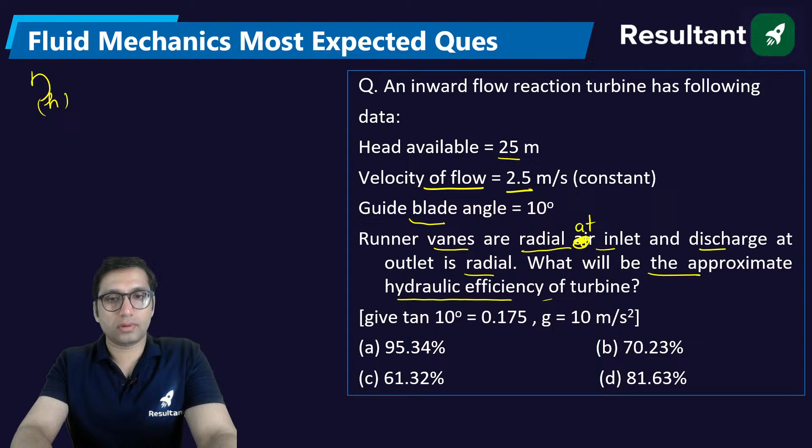So what is the formula for the hydraulic efficiency? The hydraulic efficiency is the ratio of runner power to the water power, right? Now, how can you find the runner power? The formula for runner power of a turbine is rho into Q into VW1 into U1 plus VW2 into U2.

Okay, nice strategy, Deepa. You can follow this strategy. Prepare for production subject. It is having high weightage. At least your high weightage subject will be prepared. And industrial is also having weightage of around 10 marks at least. So at least 50 to 60 marks will be prepared. That's also a great strategy. You can follow that, and there's nothing wrong in that.

And velocity of the flow is constant. So U1 is equal to U2 is equal to U, that is given to you in this question. And because at the outlet the discharge is radial, runner power will be rho into Q VW1 into U1. Now in this question they have given few things. How to find the value of hydraulic efficiency? The hydraulic efficiency will be equal to rho into Q VW1 into U1 divided by rho G QH.

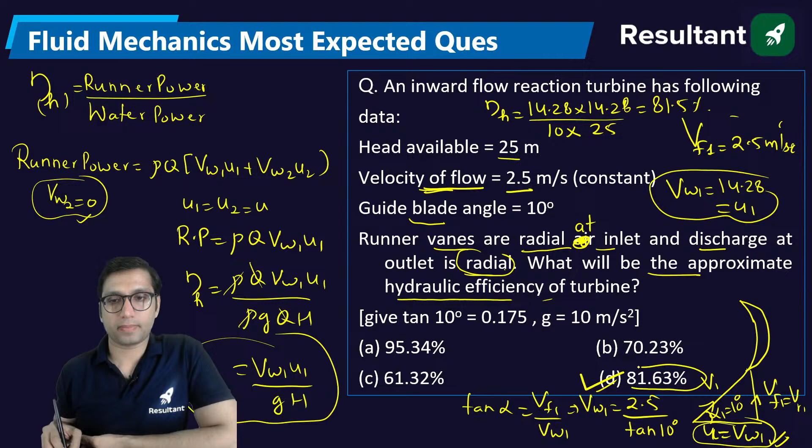Understood the question, everyone? Next question: the head loss due to friction for the flow of water through penstock can be minimized by what? How can you minimize the head loss due to friction when the water flows through the penstock of a turbine? Yes? How can you minimize that?

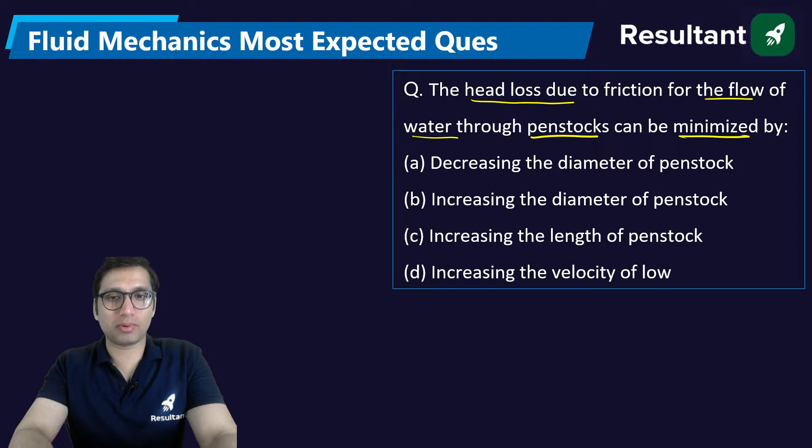Yes, what is the answer? How to minimize head loss due to friction? See, head loss due to friction is equal to FLV square by 2GD. Now formula is going to remain same. This is the formula for head loss due to friction. Head loss due to friction is minimized. How can you decrease the head loss due to friction? If you want to increase the length, increase the length. If you increase the length, this is going to increase. If you increase the diameter, then it will definitely decrease. So the right answer will be option B, increasing the diameter of the penstock.

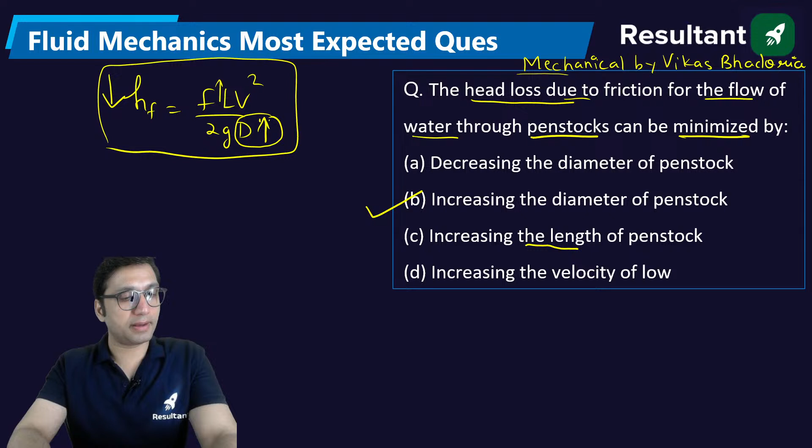An impulse turbine produces 50 kilowatt of power when the blade mean speed is 400 meter per second. What is the rate of change of momentum tangential to rotor? Yes. So the power is given for the impulse turbine. The power is given, the mean blade speed is also given. How to find the rate of change of momentum? Yes, tell me everyone. Yes, come on, respond everyone, respond.

So there are a few questions I'm taking. Sir, आप भी कर रहे हैं?

नहीं, मैं नहीं कर रहा दीपा. I am not preparing for RRB JE. RRB JE कर सकता था, बट मैंने फिर अब मैं एक्चुअली कर नहीं पाऊंगा. मतलब मेरे पास टाइम थोड़ा कम मिल पाता है. I have to full-fledged preparation, क्योंकि मेरे सब्जेक्ट्स के साथ, you guys there is an advantage कि आप लोग सब सब्जेक्ट्स पढ़ते रहते हैं, and because of that आप लोगों की काफी प्रिपरेशन हो रखी है. मेरे साथ ऐसा है कि I am not, मैं कुछ सब्जेक्ट ही पढ़ाता आया हूँ और उसी में मेरे को थोड़ा बहुत नॉलेज है. So if you compare your preparation with my preparation, I am not having that much good preparation level. Okay, सो मेरी प्रिपरेशन का लेवल और आपकी प्रिपरेशन का लेवल थोड़ा अलग है. आपको ज़्यादा अच्छे से सारे सब्जेक्ट्स आते हैं.

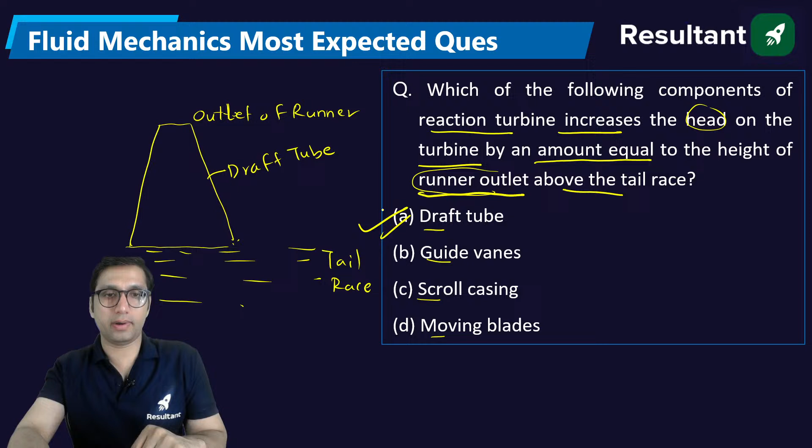Very good, draft tube. Mean diameter of runner of a Pelton turbine is 200 mm and least diameter of the jet is 1 centimeter. Calculate the jet ratio and number of buckets.

In a Pelton turbine, the mean diameter is given to you. This is a question from construction of a Pelton turbine, so it's a construction-based question. Let's try to solve this question, everyone.

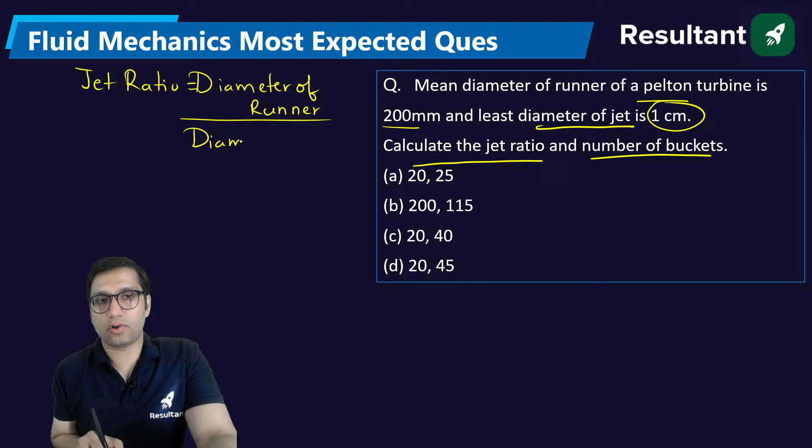So you know the formula for jet ratio? Jet ratio is equal to the ratio of diameter of runner to the diameter of jet. You can easily find this. So 200 mm and 1 centimeter, that is equal to 10 mm. So this is simply 200 by 10 mm, and you will get this value as 20.

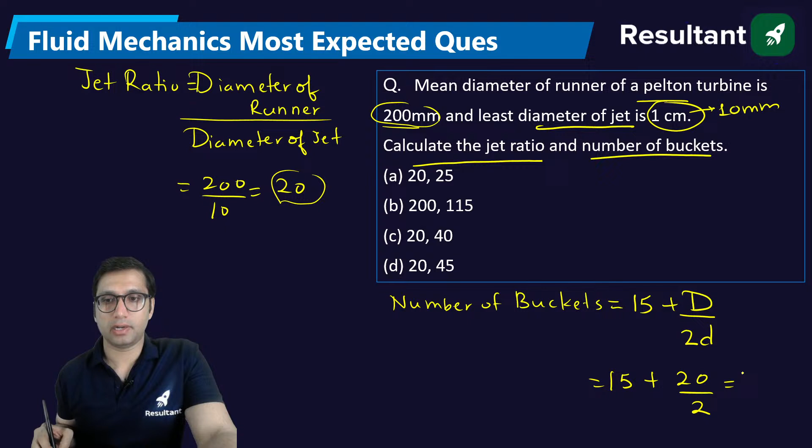Now number of buckets, what is the formula for number of buckets? The number of buckets of a Pelton turbine, the formula is 15 plus diameter of the runner to 2 times the diameter of the jet. If you put it here, you get 15 plus 20 by 2, so you will simply get this value as 25. So 20, 25. Very good.

Next question. Consider fully developed flow in a circular pipe with negligible entrance length effects. Assuming the mass flow rate, density and friction factor to be constant, if the length of the pipe is doubled and the diameter is halved, the head loss due to friction will increase by a factor of?

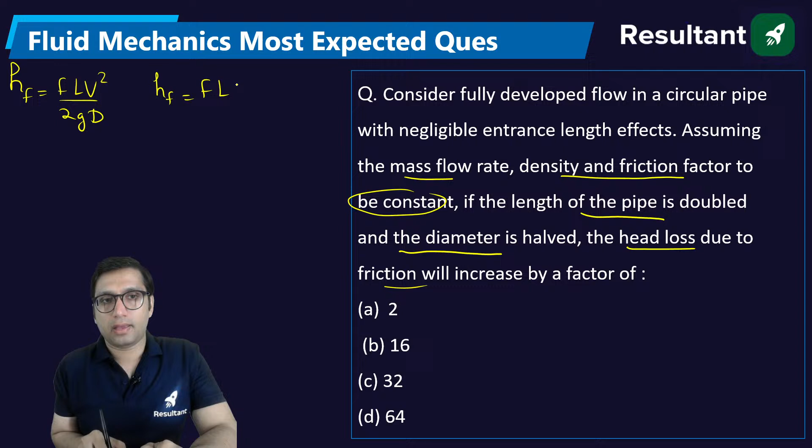Head loss due to friction has many formulas. You can write this formula FLV square by 2GD. You can use this formula FLQ square by 12D power 5.

Now, for fully developed flow in a circular pipe with negligible entrance length, assuming the mass flow rate, density and friction factor to be constant, the length of the pipe is doubled, the diameter is halved, the head loss due to friction will increase by a factor of.

Yes, come on, tell me how to solve this question. There is also one formula for head loss, that is 32 mu VL by rho G D square. This is also one formula. But in this formula, this is not the formula with respect to discharge. That's why we cannot use this formula.

So we need to use a formula which relates head loss with length and diameter. With the length and diameter, the head loss can be expressed like this. Length is double, that is L2 is 2 times L1, and diameter is half, D2 is D1 by 2. So head loss due to friction will increase by a factor, that is HF2 by HF1 will be equal to what? Tell me.

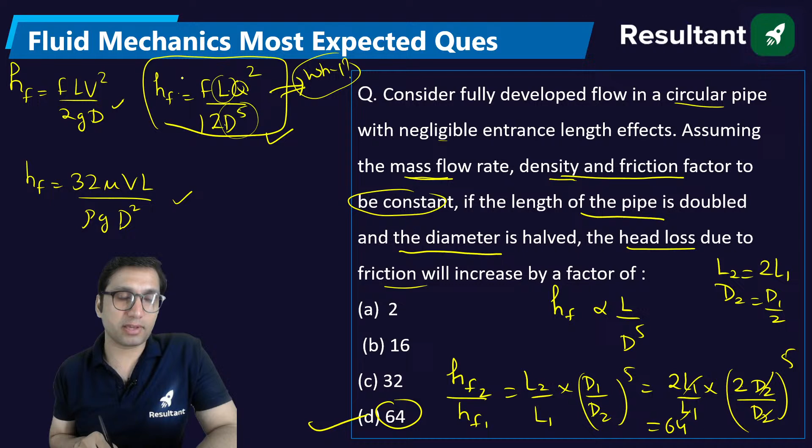The velocity along the radius of a pipe of 0.1 meter radius varies as velocity equals 10 into 1 minus r by 0.1, whole square. This kind of relation is given. Viscosity is 0.02 Newton second per meter square. You have to find the maximum value of shear stress.

How are you going to find this?

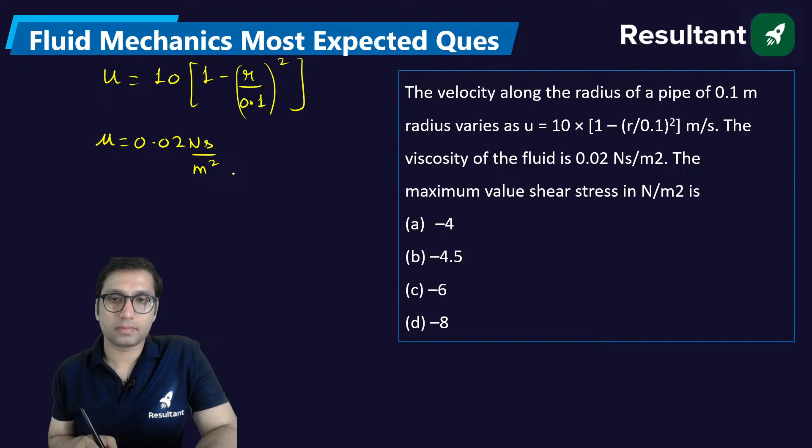Now you can see that velocity along the radius of a pipe of 0.1 meter radius varies as this. This is the relation of the velocity. Now can you compare this relation with this relation? U is equal to U maximum into 1 minus r square by r square. We can compare with this relation, or you can compare it with u is equal to u max into 1 minus r by R whole square. Now, what is the formula for maximum value of shear stress?

Maximum shear stress is equal to minus of del P by del X into R by 2. This is the formula for maximum shear stress. Now question is how to find the maximum shear stress.

Now this maximum velocity, if you compare, the maximum velocity is equal to 10. Maximum velocity by comparison will be equal to 10. And the formula for maximum velocity is minus 1 by 4 mu, del P by del X, R square. Clear? So from here you can get the value, you can see what you need to find.

You need to find this value. So how to find the value of this? Tell me. From here you will get that del P by del X into R square will be equal to minus 40 mu, right?

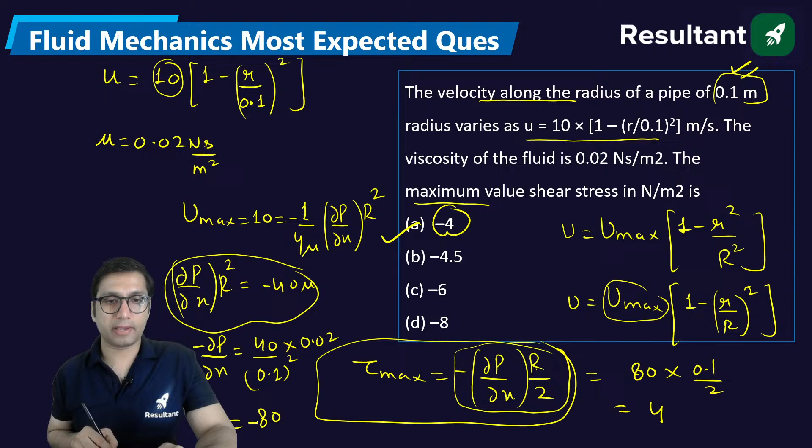Now question is, you will get this value as 4. Okay, so either you can say minus 4. I have taken this value as minus del P by del X. So del P by del X will be equal to what? It will be minus 80. So you will get this value as minus 4. Okay, minus 4 shear stress. Next question.

A cubical wooden block of edge 100 mm and weight 1 kilonewton is sliding down on an inclined plane of inclination 30 degree with the horizontal. So we have an inclined plane and we have a cubical block. A cubical block is there and it is sliding down the inclined plane. The inclined plane is at an angle of 30 degree. This is the weight of the plane, sorry, weight is 1 kilonewton.

So obviously it will be having two components. If you resolve it, it will be having two components. This is 30 degree. So this will be 1 kilonewton cos 30 degree, and this will be 1 kilonewton sin 30 degree.

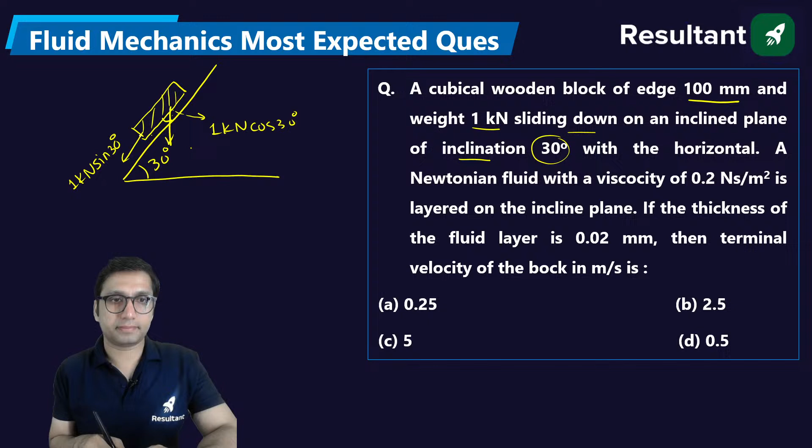So you know that obviously the inclined plane, the block is going to move downward, right? So this is a force which will be acting. Now you have to find in this question the value of terminal velocity. Now shear stress is equal to mu du by dy, right? Shear stress is equal to shear force per unit area, that is mu du. Now instead of writing du, you can write v. Instead of writing dy, you can write the value of this, 0.02 mm, so 0.02 into 10 power minus 3.

You have to find this value of terminal velocity. Mu is given to you in this question. This force will be equal to how much? This force will be 1000 into sine 30 divided by area. Area will be 0.1 into 0.1, is equal to mu, that is 0.2 into v by 0.02 into 10 power minus 3. If you solve it, you will get velocity.

What is the terminal velocity? Tell me, everyone. Solved it, everyone? Please solve it and tell me the answer. Many of you are giving answer as 5. Are you sure 5 is the answer? Okay, so we lock it on 5. So the right answer is 5 meter per second. Very good.

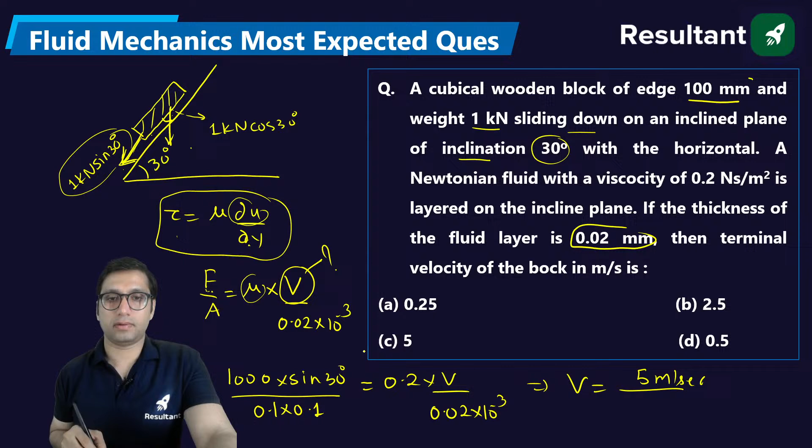Next question. If a pipe contains an oil of specific gravity 0.9 and a differential manometer connected at the 2 points A and B shows a difference in the mercury level as 15 centimeter, then difference of the pressure at the 2 points will be. Difference of the pressure, how you will find the difference of the pressure?

Come on, tell me, everyone. Try to solve it. So I am taking all types of questions. I'm trying to take all the types of questions. So we have a differential manometer. Obviously, a differential manometer is used to find the pressure difference between two sections of a pipe. So it will be somewhat like this.

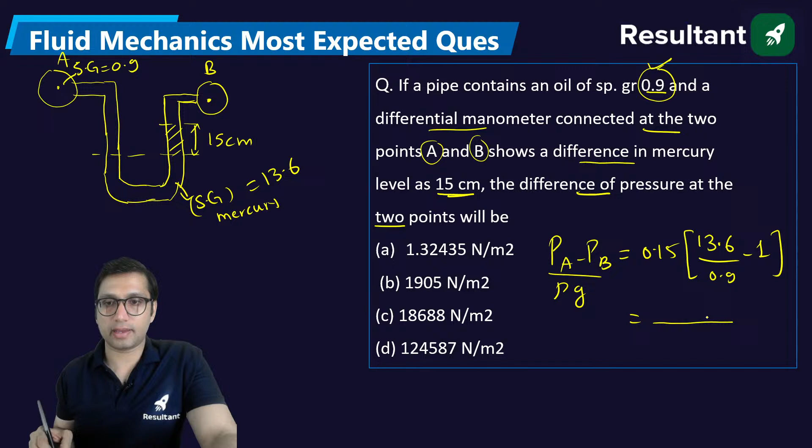Okay, and because both the pipes are having the same liquid, having specific gravity 0.9, you will get this value, PA minus PB by rho G, from here, and then you will multiply this with 900 into 9.81 into 0.15, into 13.6 by 0.9 minus 1. You will get the difference of pressure, which is 18688. Okay, option C. Are you all getting this value? Tell me, everyone.

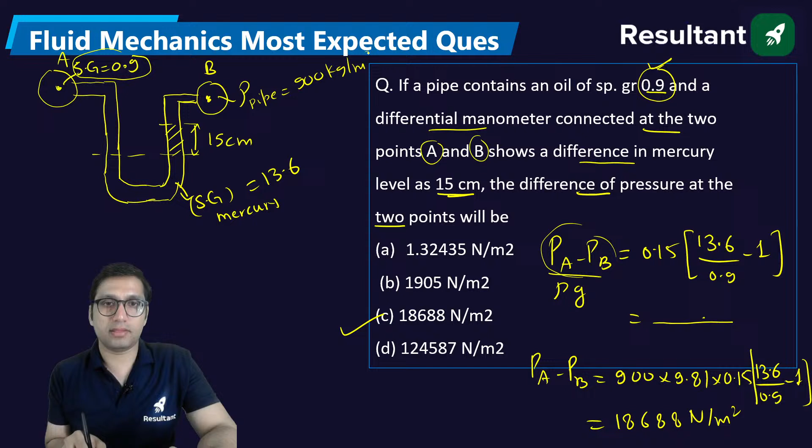18688.05. Okay, you must be thinking, sir, why are you multiplying with 900? Because we are finding the pressure difference between the pipes. Now in the pipe, the fluid is having a specific gravity of 0.9, so the density of the fluid in the pipe will be 900. So we'll be using 900 kg per meter cube as density, not 13600.

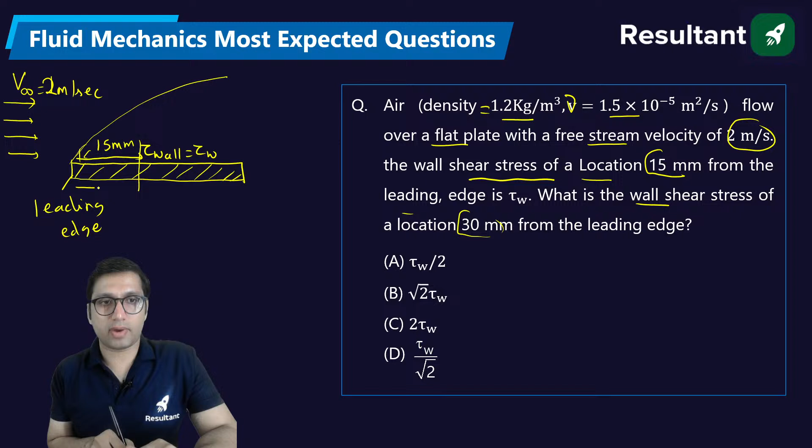So it is saying that the wall shear stress at a location 15 mm from the leading edge. So let's say this is 15 mm. So here the wall shear stress is equal to tau W. This distance is 15 mm. What is the wall shear stress at a location 30 mm from the leading edge? So at 30 mm from the leading edge, what will be the wall shear stress?

Now you know that the wall shear stress is inversely proportional to square root of x. What is x? X is the distance from the leading edge. This is the formula, the relation between the shear stress and the distance from the leading edge. So tau 2 by tau 1 will be equal to square root of x1 by x2, which is simply square root of 15 by 30, or 1 by root 2. So tau 2 will be equal to tau 1 by square root 2.

Okay. Clear to everyone? So the right answer is option D. Remember this relation between the wall shear stress and the distance from the leading edge, where x represents the distance from the leading edge. This relation is important. It can be asked in some exams also.

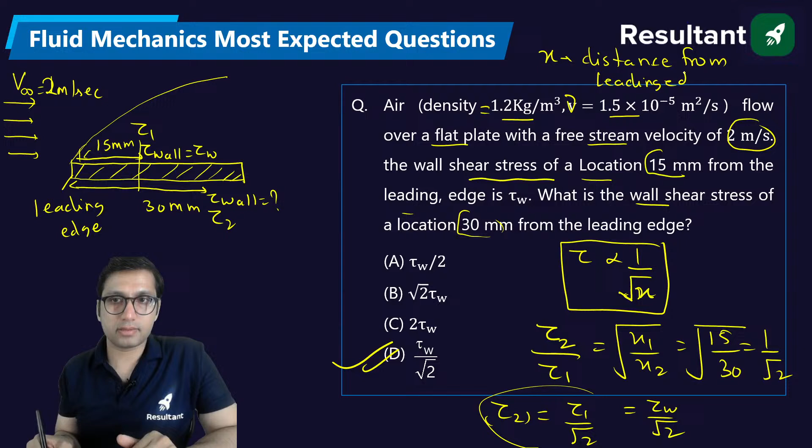Next question. For a two-dimensional incompressible flow having velocity components u and v in x and y direction respectively, this expression can be simplified to what? Come on everyone. So this is the expression del by del x of u square plus del by del y of uv. If you differentiate del by del x of u square, you will get 2 times del u by del x, plus if you differentiate uv using the product rule, you will get u del v by del y plus v del u by del y.

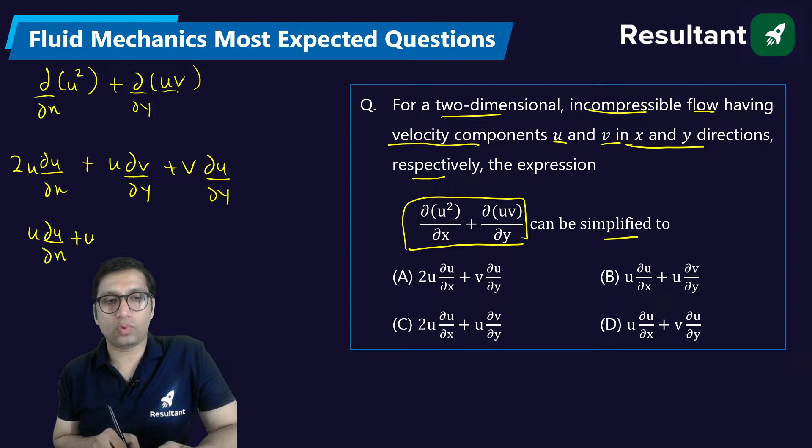Now 2 times del u by del x can be written as del u by del x plus del u by del x. Sorry, I have made a mistake. This is not just 2, this will be 2 u del u by del x, which can be written as u del u by del x plus u del u by del x plus u del v by del y plus v del u by del y.

Now, because it is a case of two-dimensional incompressible flow, the continuity equation is del u by del x plus del v by del y equal to 0. This is called the continuity equation in two-dimensional incompressible flow. So this equation can be written as u del u by del x plus u times (del u by del x plus del v by del y) plus v del u by del y. This term is 0, so you will get u del u by del x plus v del u by del y. This will be the answer.

Clear? Understood everyone? Have you understood this question? Tell me. It's not a tough question. A little bit of differentiation we have used and we have got the result.

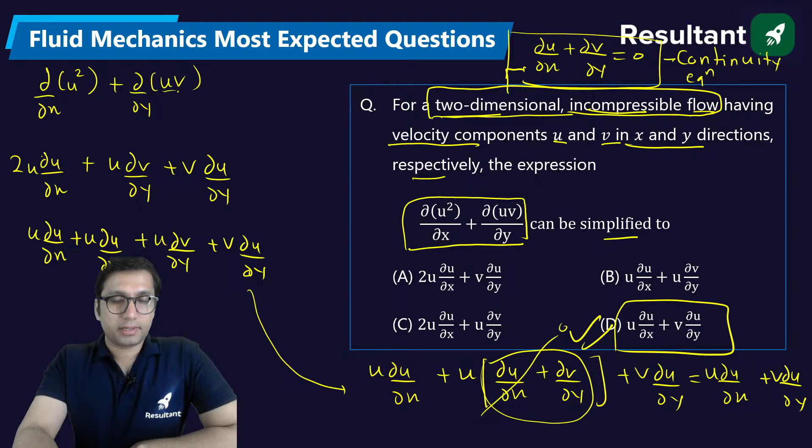If the velocity distribution is given by u by V equal to 1 minus y by delta, then you have to find the value of momentum thickness. How to find momentum thickness? Momentum thickness theta is equal to integral from 0 to delta of u by u infinity times 1 minus u by u infinity dy. Now u by u infinity, or u by V, is 1 minus y by delta, into 1 minus (1 minus y by delta) dy.

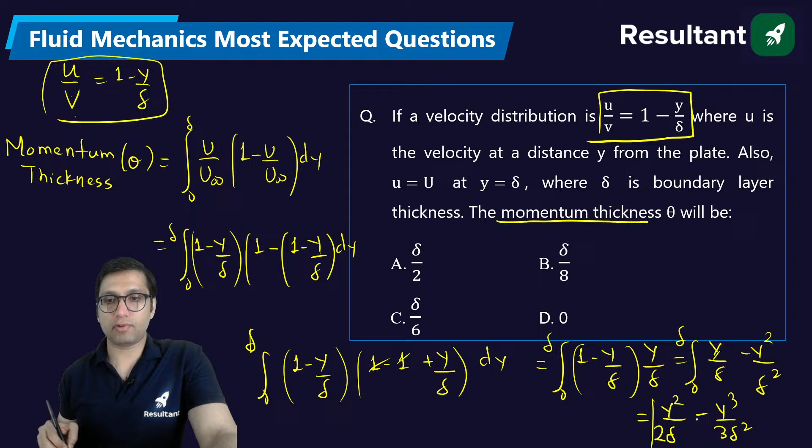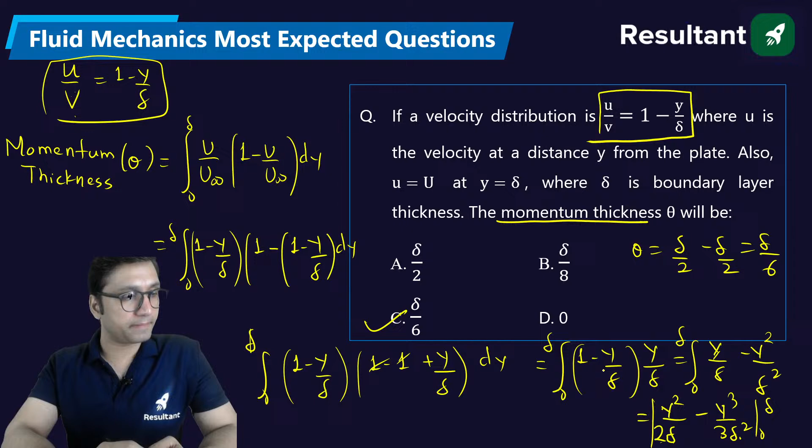Now when you solve it, if you put 0 to delta limit, momentum thickness will become delta by 2 minus delta by 3, which will give you delta by 6. Okay, when you integrate. Clear to everyone? Because when you put the limit, this will become delta square by 2 delta. This will become delta cube by 3 delta square. When you solve it, you will get this. Clear? Next question.

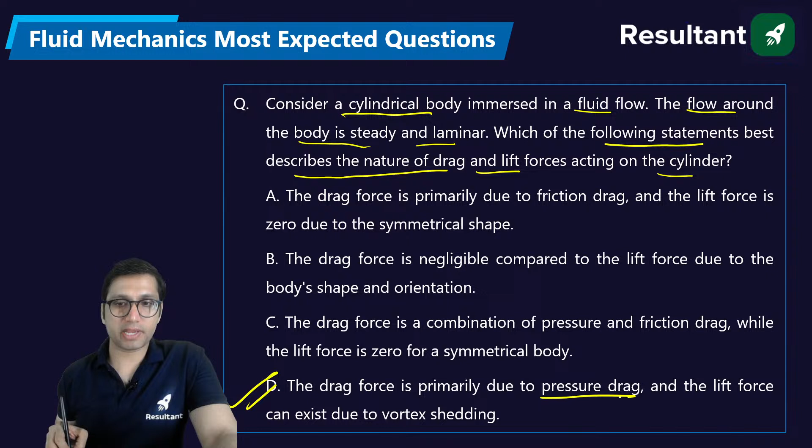Yes. So the right answer is option D. The drag force is basically due to pressure drag and the lift force is due to vortex shedding. Okay, so that's the reason for drag and lift forces.

Next question. According to Prandtl mixing length theory, what is the formula for turbulent shear stress? There are different theories for shear stress in turbulent flow, and which of the following is responsible for the Prandtl mixing length model? How can you write the turbulent shear stress? Yes. How can you write the turbulent shear stress according to Prandtl mixing length model?

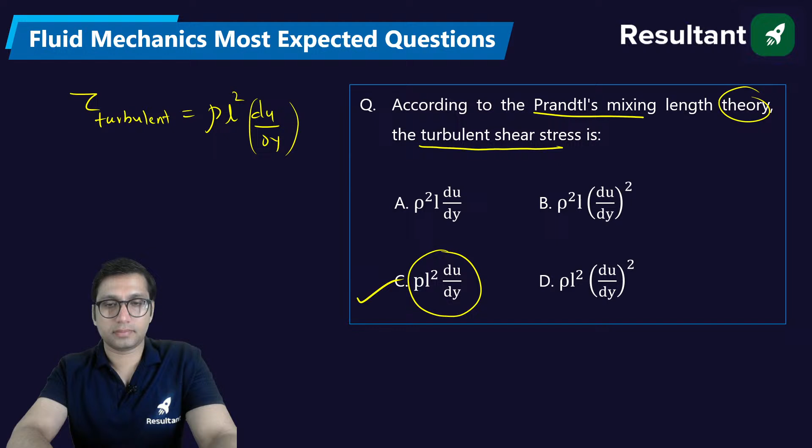So according to Prandtl mixing length model, the turbulent shear stress is equal to rho L square into du by dy. Okay, so this is the answer, rho L square du by dy, that is option C. Option D, many of you are marking option D as the answer. But according to Prandtl mixing length theory, the turbulent shear stress is equal to rho L square into du by dy. Okay? Option C will be the right answer.

Many of you... rho L square du by dy whole square, sorry. It will be du by dy whole square, sorry, option D. Yes. Option D will be the right answer. Very good. So what is Prandtl mixing length?

Normally, the turbulent shear stress according to Reynolds is equal to rho into u dash into v dash. u dash and v dash are called turbulent velocity. Okay. Or we can say u dash and v dash are called fluctuating velocity in turbulent flow. Fluctuating velocity. Okay.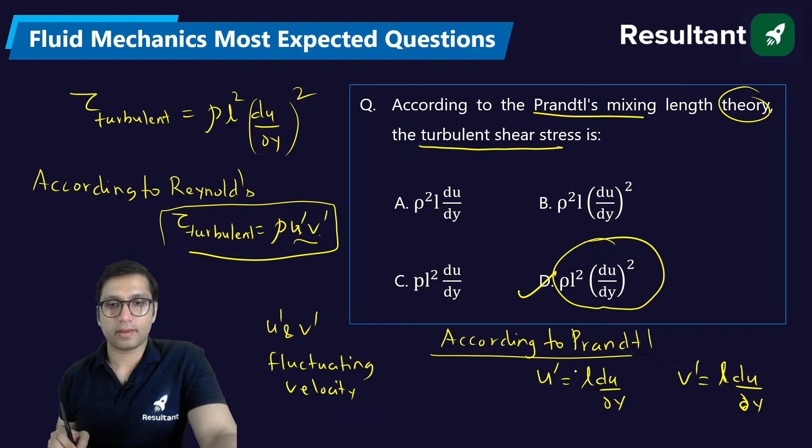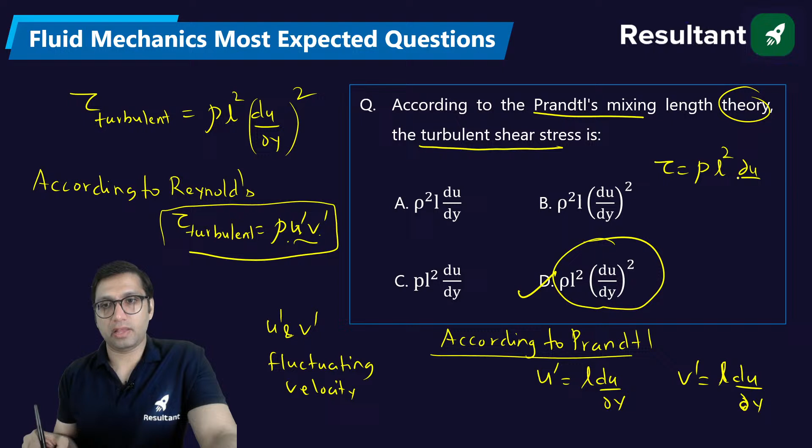Now, according to Prandtl, he said that the fluctuating velocity u dash is equal to L du by dy and v dash is equal to L du by dy. Okay, as per Prandtl, these are the velocities. Now, if you put these velocities in this formula, you will get shear stress is equal to rho L square du by dy whole square. Understood? That's how you get this.

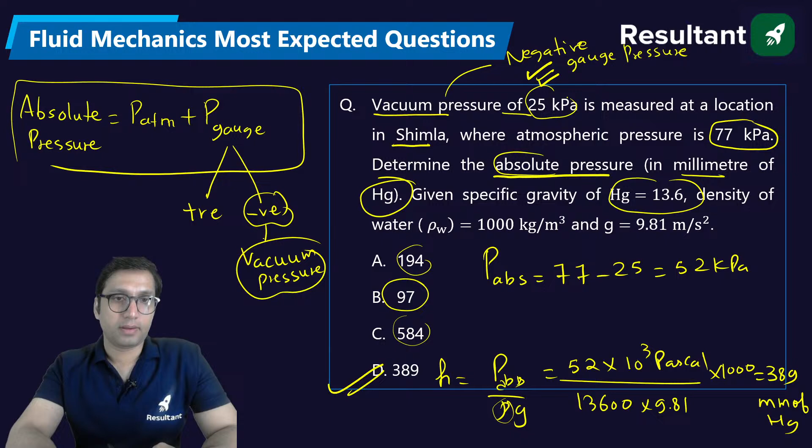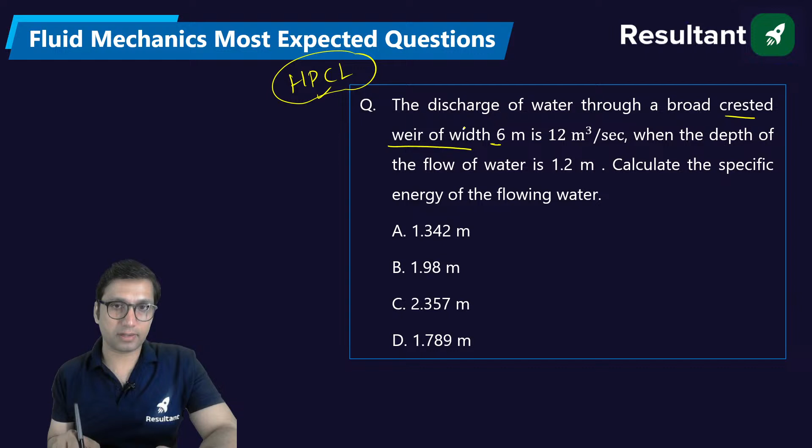Very good. The discharge of water through a broad crested weir of width 6 meter. Now this question came in the HPCL exam in the mechanical syllabus. You know that notches and weirs are not in the syllabus, but sometimes they can ask you a question. In the HPCL paper, the question came from notches and weirs. You have to find the specific energy of the flowing water.

Yes, how to find the specific energy? Come on, tell me everyone. Tell me everyone quickly. We are just going to end the session. This is the last question for today's session. Come on, tell me.

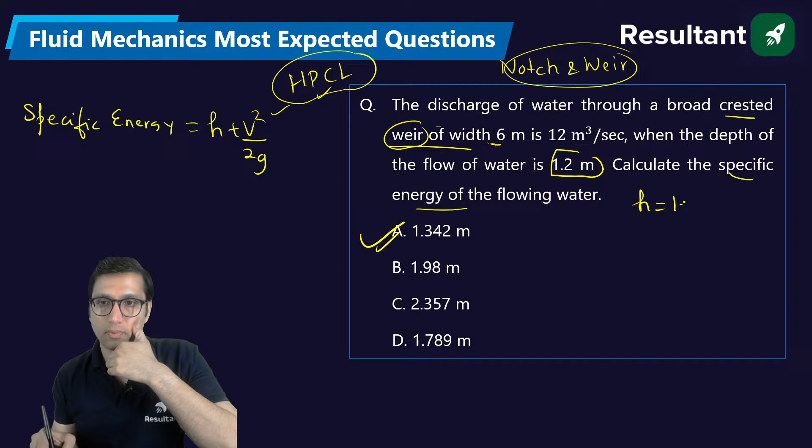So the specific energy will be 1.342, option A. And how to solve for the specific energy? Specific energy is equal to H plus V square by 2g. Okay. Now, first of all, we need to find the value of H. H in this question is given. Depth is given, so H is already given, that is equal to 1.2 meter, and you need to find velocity.

How will we find velocity? Discharge is given. Discharge is equal to area into velocity. Okay, and what is area? Area is equal to width into height, into velocity. Discharge is 12, width is 6, height is 1.2, into velocity. You will get velocity from here. So what is the value of velocity? Tell me. You will get 1.67 meter per second. Okay.

Now just put it here. You will get 1.2 plus 1.67 square by 2 into 9.8. Solve it, you will get 1.34. Okay.

Birmingham, I think these are something which is not related to mechanical. I have never studied this Birmingham wire gauge. Raj, my dear, I have not studied these things. I think this is not something that I have taught.

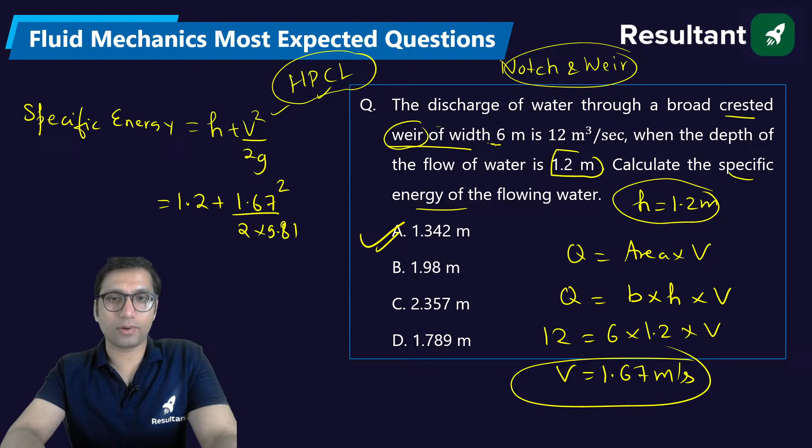Okay, let's take this as our last question. Based on the following two statements related to manometers, select the correct option. A piezometer tube can measure the pressure in a container that is lesser than atmospheric pressure. Wrong. A piezometer measures positive pressure. It only measures positive pressure, not negative pressure. You cannot measure negative pressure. So pressure less than atmospheric pressure is not possible.

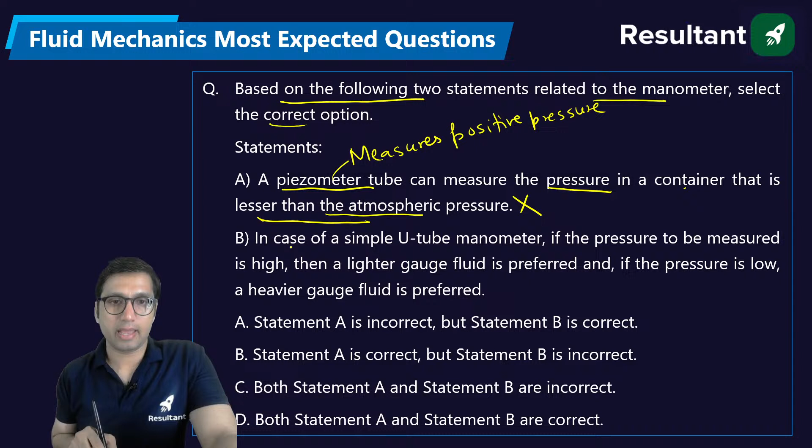In case of a simple U-tube manometer, if the pressure to be measured is high, then a lighter gauge fluid is preferred, and if the pressure is low, heavier is preferred. This is also wrong because both of the things have been interchanged. In case of a simple U-tube manometer, if the pressure to be measured is high, then a heavier fluid is preferred. And if the pressure is low, then lighter is preferred. So everything is just interchanged here.

So what is the right answer? Both statement A and B are incorrect. Both the statements are incorrect.